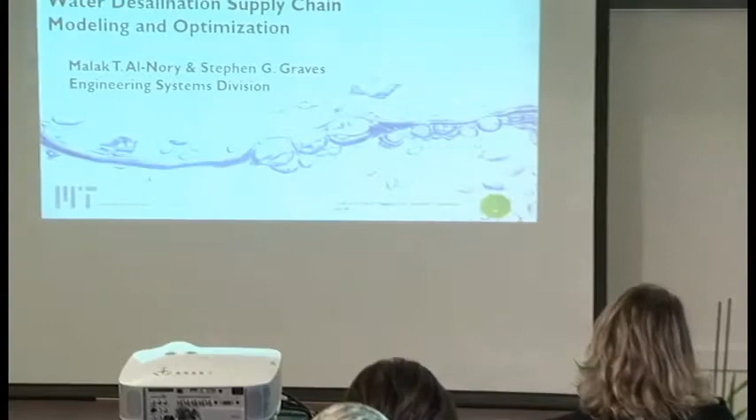I'm Malak Al Nory. I'm working with Professor Steve Graves from Engineering Systems Division. My work is basically focused on modeling the water desalination network as a supply chain. The main idea is that we can benefit from existing models in the supply chain theories to be able to optimize the performance of the desalination supply chain. So for the first time, looking at the desalination industry network from a supply chain perspective.

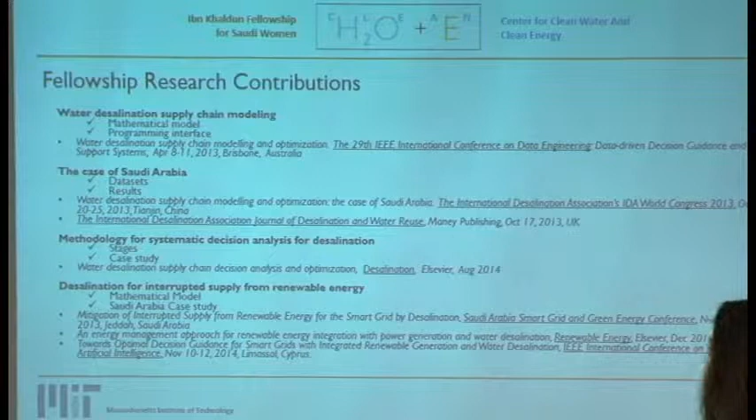These are the areas that I looked at in my fellowship. By the way, I'm the last speaker, but I'm the first Ibn Khaldun Fellow. I started in September 2012, so basically I'm in my third year now. I looked at the water desalination supply chain modeling. That was the proposal of the main idea. And this work was discussed in IEEE International Conference on Data Engineering in Brisbane, Australia.

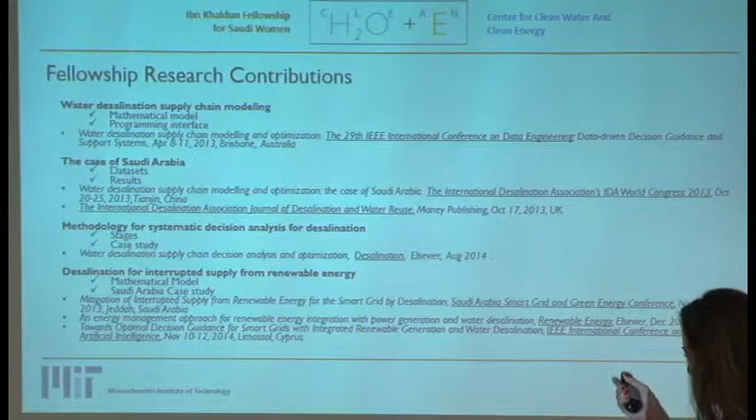Also, I looked at the application on the case of Saudi Arabia, and that was discussed in International Desalination Association World Congress in Tianjin, China, and IDA Journal of Desalination and Water Reuse. And then we proposed a methodology for decision makers in desalination. And this was published recently in the Desalination Journal in Elsevier, this August.

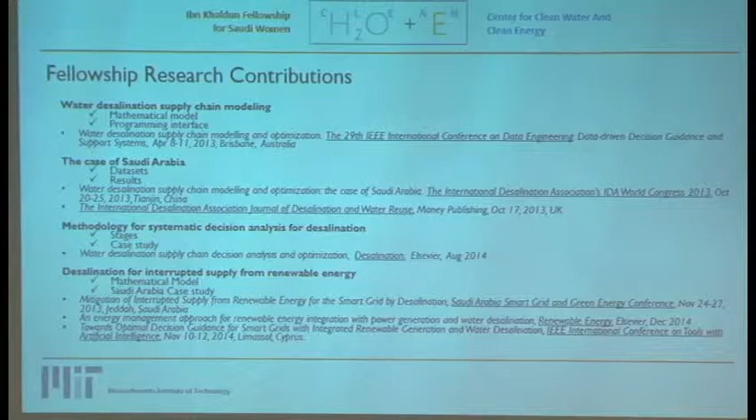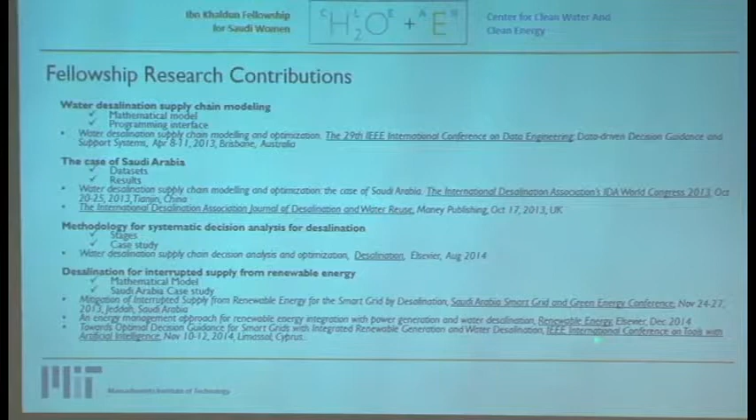And the last area that I worked on is desalination for interrupted supply from renewable energy. That was my work during this past year. Initially, the work has been discussed in Saudi Arabia Smart Grid and Green Energy Conference, and then an extended model proposed in the Renewable Energy Elsevier Journal, available online, but the publication date is December 2014.

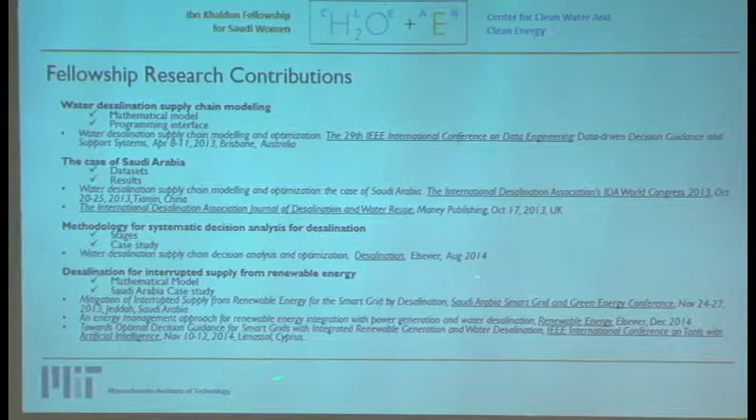And I will be presenting an extended model next month in IEEE International Conference on Tools with Artificial Intelligence. So I'll first start by talking about the first three areas, which is the main idea.

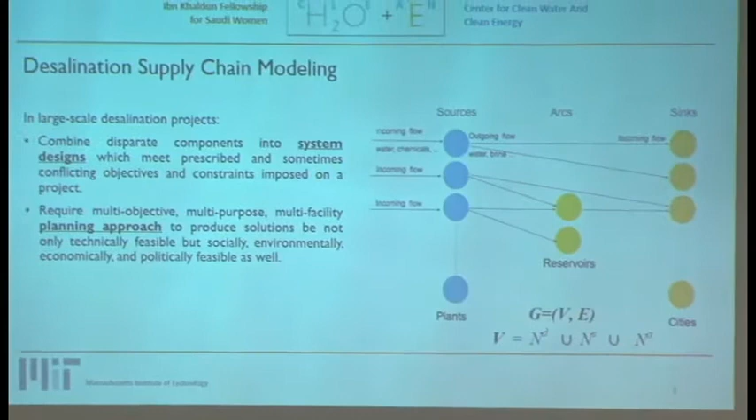Mainly in desalination projects, there are many strategic decision alternatives that need to take place when we first start to establish the desalination plants. In terms of what is the technology that needs to be used, what is the energy source that needs to be implemented, what is the capacity that needs to be installed, which geographic location, and many other technical decisions related

to the design of the plant and the operations of the plant, how much should we produce, also the network structure, how should it be, and how can we use it, and what are the quantities that should be pushed through the network. Specifically in large-scale desalination projects, there are many different components that we need to look at in order to create system designs.

Now, viewing the desalination network as a supply chain allows us to optimize at a system level, at the global level, rather than just looking at optimized performance for a specific unit or a specific plant. So this way we can basically perform multiple objective models and multiple purpose, possibly looking at cogeneration of water and power, and looking at a multi-facility planning approach.

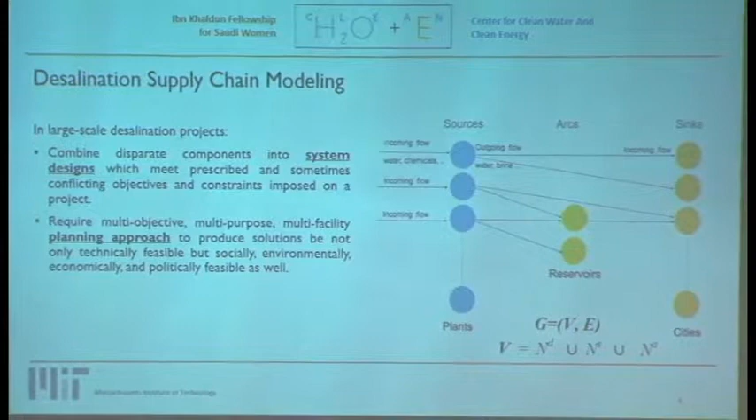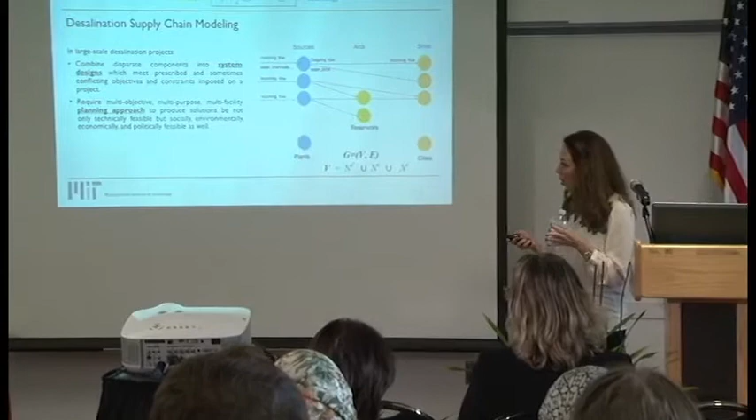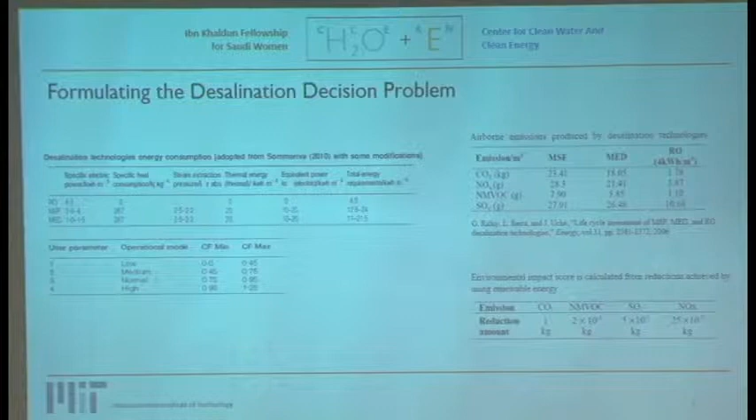For example, we looked at the capacity factor, and we modeled that into the network model. We looked at the energy consumption as well, thermal versus electrical consumption for the different desalination technologies. We looked at the airborne emissions, CO2, and the different airborne emissions by different desalination technologies, as we can see here.

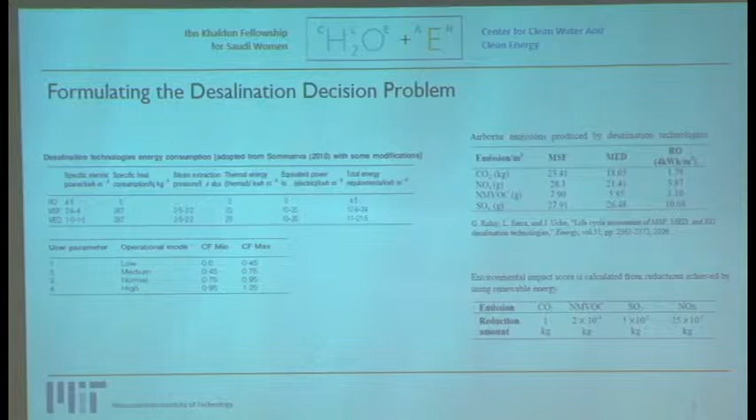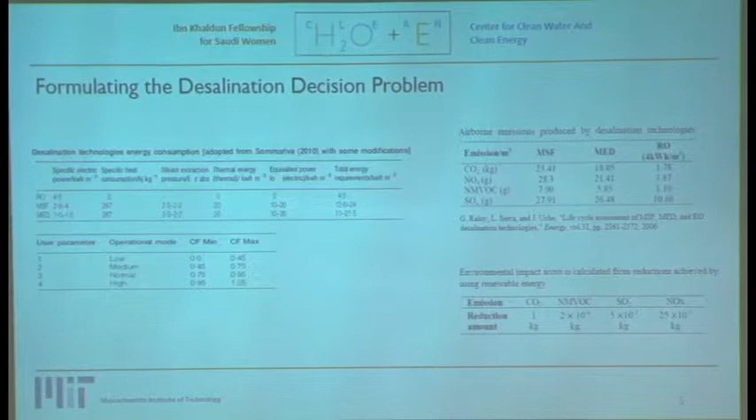And we created a way so we can scale or give a score for each desalination network design. And this score is based on the amount of the reduction that we can achieve by using renewable energy instead of the conventional desalination technology for each of the components.

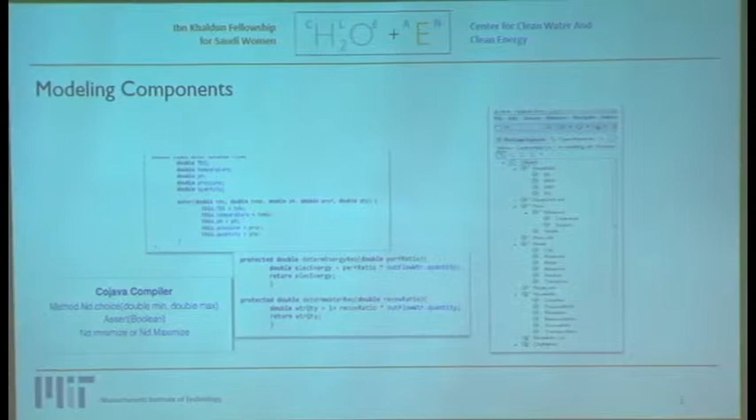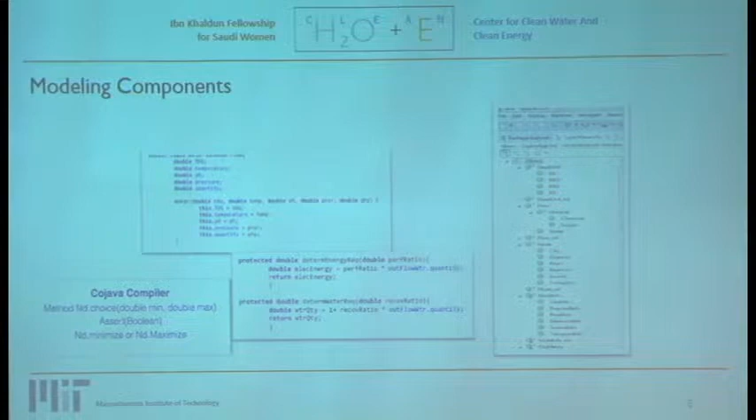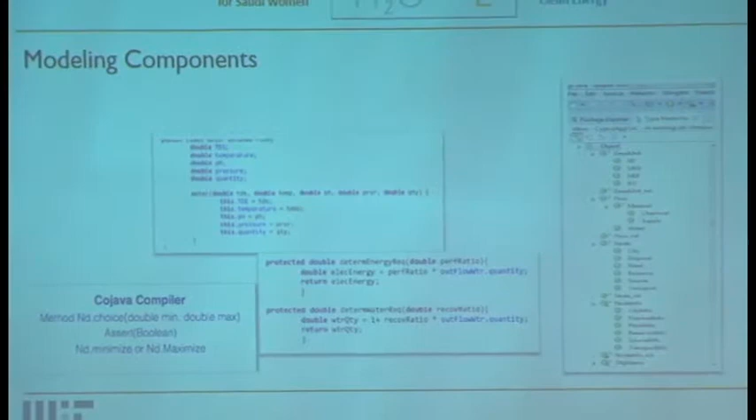Initially, we created a programming interface based on Java programming, so the user can compose the desalination network visually by simply pulling these Java classes, which represent the desalination units, the material, the different nodes, and these can visually be translated into Java code, and then using a specific compiler, it can be translated into a mathematical model, and then can be solved on mathematical solvers. Then the user can obtain optimal solutions for their specific suggested design.

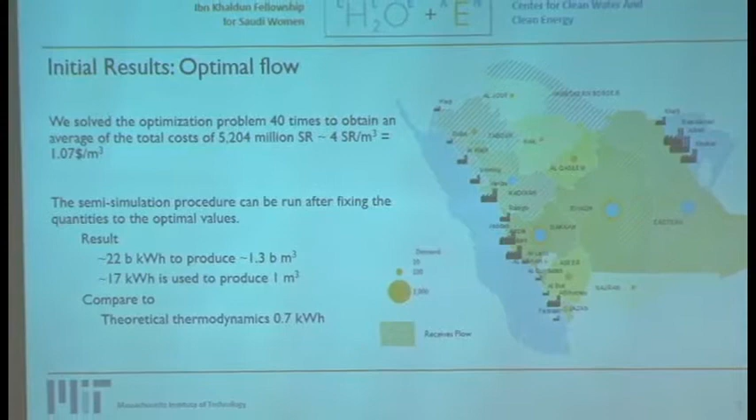From the initial analysis that we have done using that previous modeling components and the network model, we obtained these results, which is basically what is the optimal flow of desalinated water given the existing desalination capacity and the existing network in the country and the demand in the different 13 regions of the country. Where should the flow go?

So you can see the striped areas here that should receive flow, and the other areas should not possibly receive flow. They rather should use other types of water resource because it's not feasible or not economically optimal to receive it here. And we did analysis at the average cost of producing 1 cubic meter of water, which is $1.07 overall as an average.

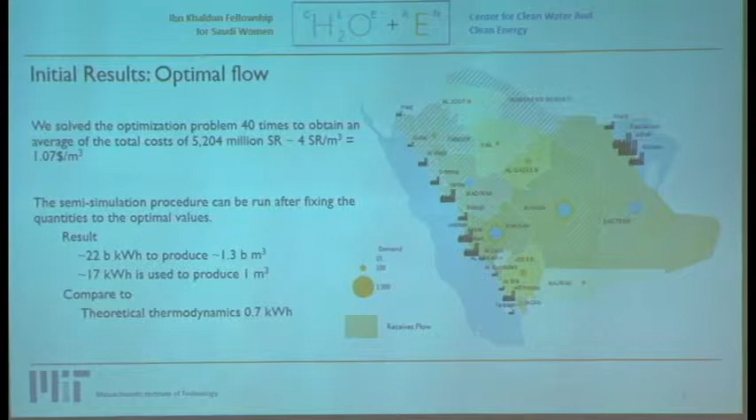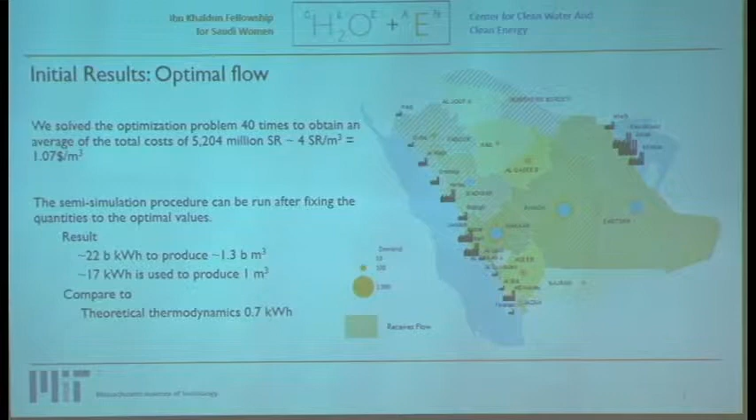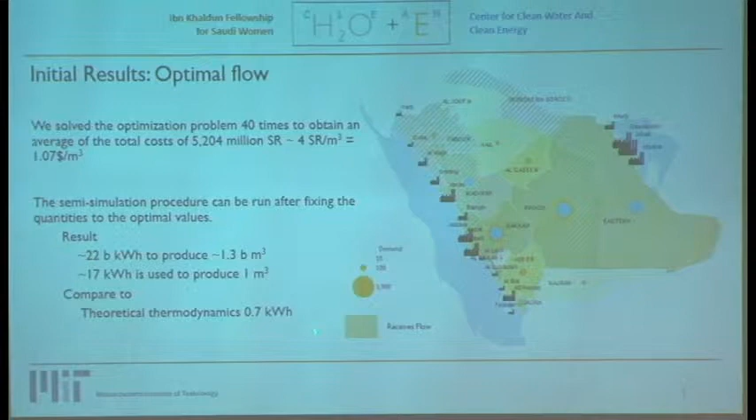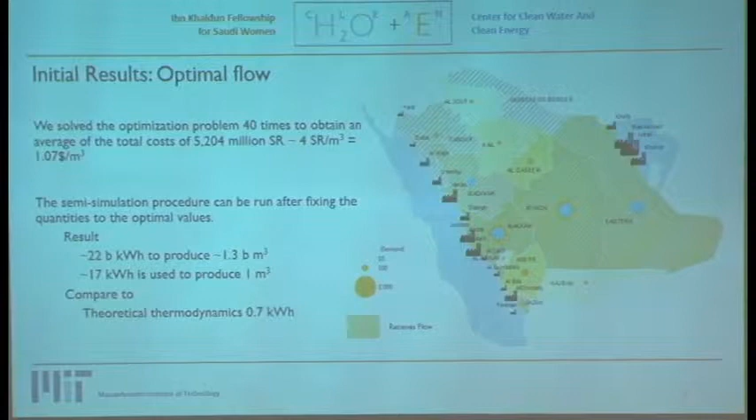And this might seem efficient, but this, however, includes lots of subsidized prices for fuel. So this would be misleading. But looking at the energy consumption, which is on average 17 kilowatt hours to produce 1 cubic meter, and comparing this to the 0.7 theoretical thermodynamic minimum shows that this is not an efficient operation. Basically, because in Saudi Arabia they mainly use the MSF and MED, the thermal processes.

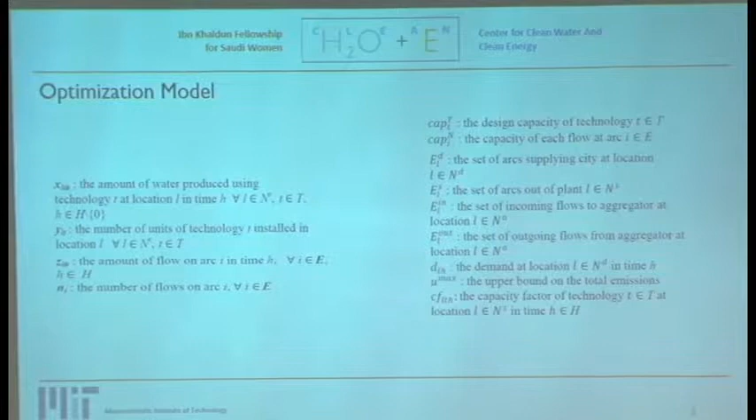We extended that network model into a more elaborate optimization model with mainly 4 decision variables. It includes the amount of water that needs to be produced by a specific technology at a certain location in a certain time in the horizon, and the number of units that should be installed from this technology in this location. So if the number of units is 0, then this technology should not be installed at this location. Also, the amount of flow on a specific arc at a specific time in the horizon, and the number of flows.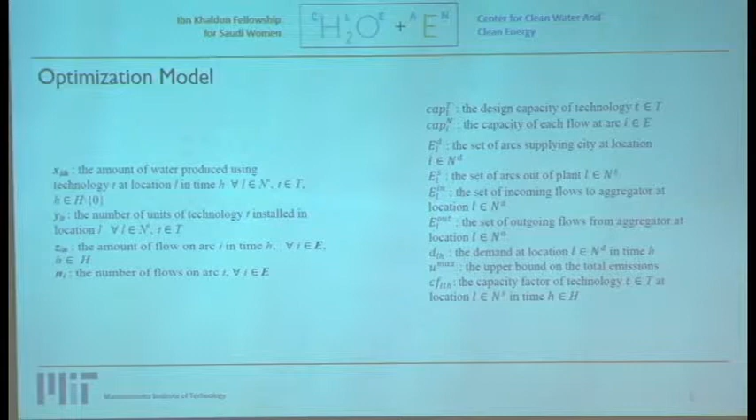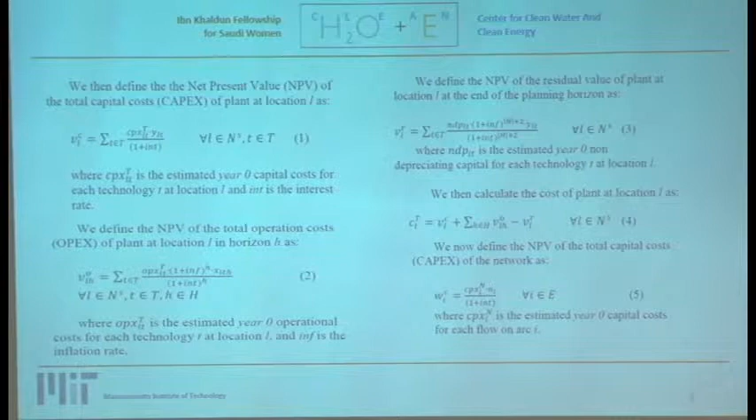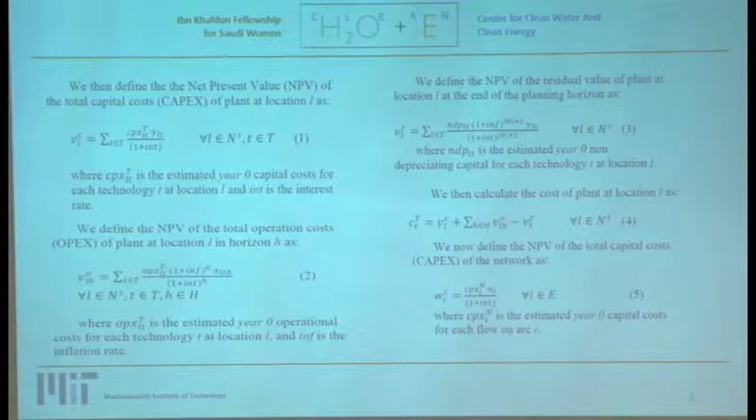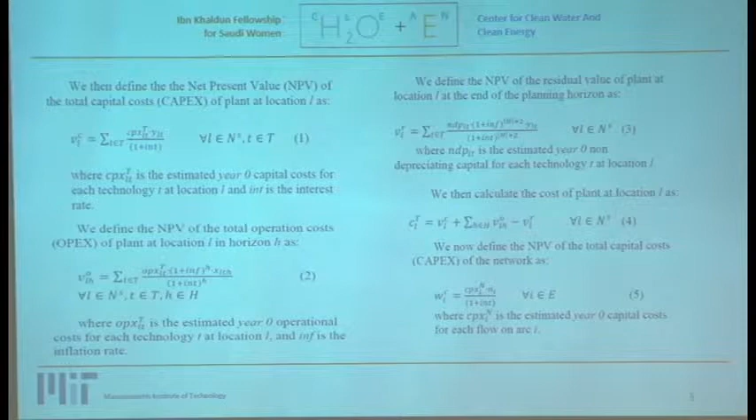Also different parameters. I don't want to go through all these, but mainly the design capacities and the capacity factor for the desalination technologies. We also used constraints to specify the other important aspects of the problem. We looked at the net present value of the CAPEX, which is the capital cost, and the OPEX, the operational cost. Also, the residual value of a plant after the end of the planning horizon, so the depreciation of the land and the equipment and so on, to obtain the total cost of a plant with a certain technology at a certain location.

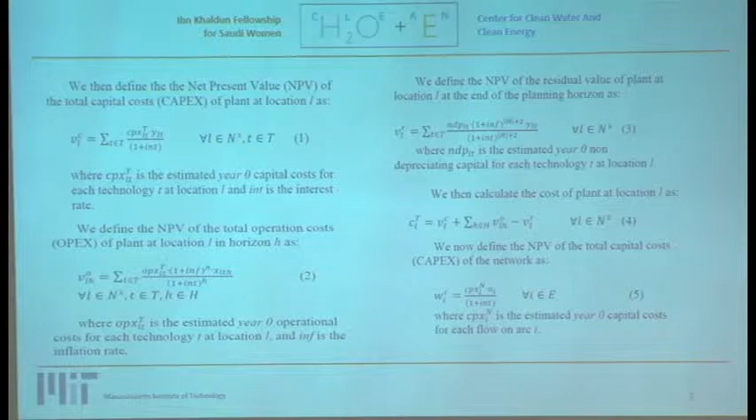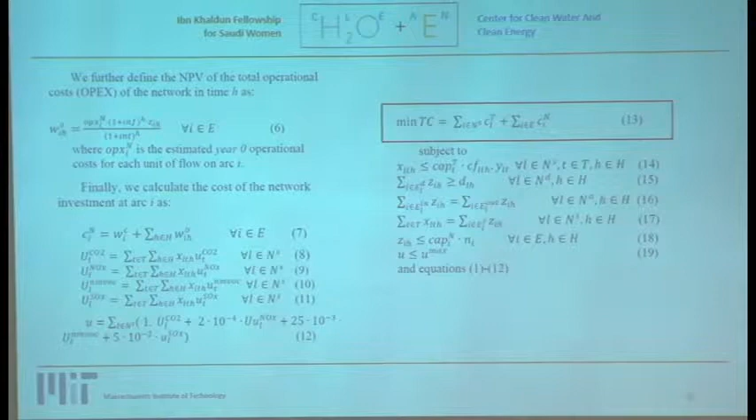We also looked at the NPV of CAPEX and OPEX of the network structure to obtain the total cost of the investment in the network. We also have constraints to represent the environmental impact of certain technologies installed and certain production levels. The objective function then is to minimize the total cost of both the investment in the desalination plants and the network as well, subject to additional constraints of capacity factors, meeting the demand, network structure and the capacity of the network, and an upper limit of airborne emissions from the technology.

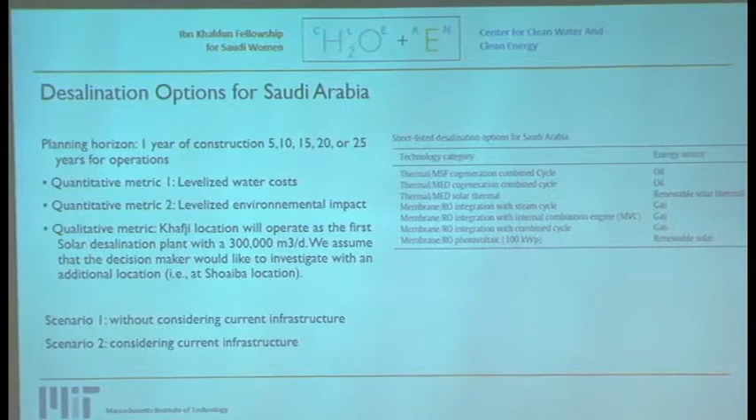Now, we applied this on a case study of Saudi Arabia, of course. We started by looking at the different desalination options in Saudi Arabia, going through the literature and then shortlisting these options from the literature and by consulting with an expert. We see here that the shortlisted technologies suitable for Saudi Arabia, based on the existing ones, the literature review and the expert opinion, are MSF cogeneration, MED cogeneration, MED solar thermal, RO steam cycle, RO with internal combustion engine, RO with combined cycle, and RO PV.

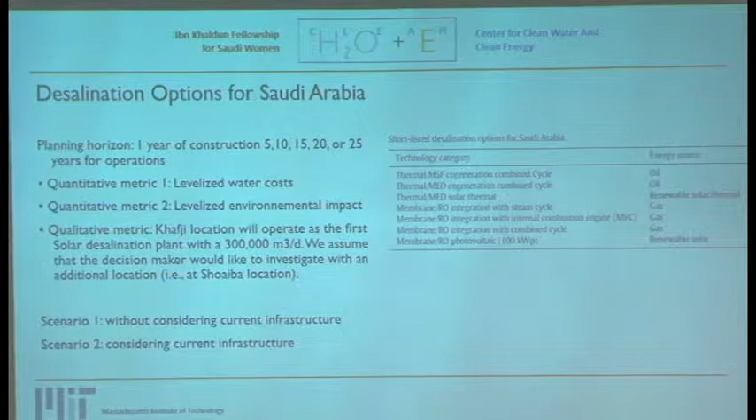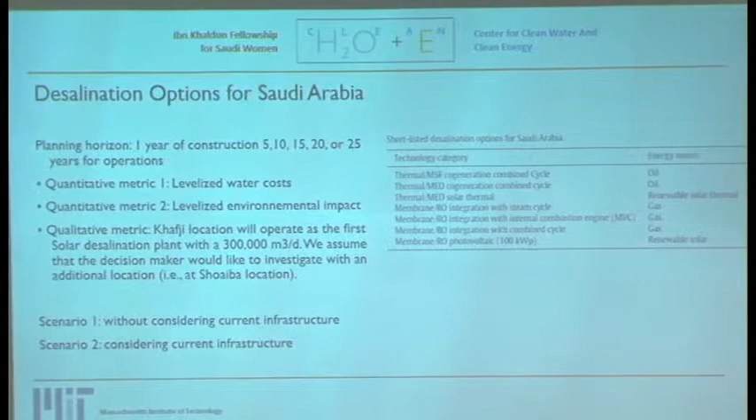Given the optimization model that we created and the methodology that we also proposed, we assume that the decision makers will look at two quantitative metrics. So decision makers can basically use one or more quantitative metrics or performance measures of the specific structure of the desalination network. So we assume that they are interested mainly in the levelized water cost, and second in the levelized environmental impact. We also give the means for the decision maker to add qualitative metrics, as long as they can be represented as additional constraints to the optimization model.

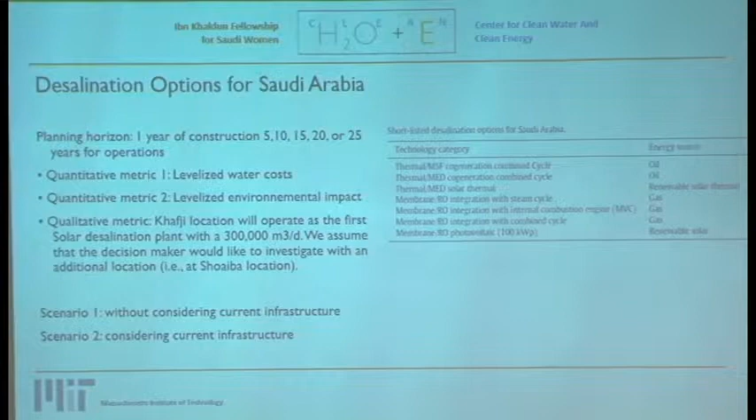So we assumed here that the qualitative metric is that since the Khafji location, as Nora mentioned in her talk, is the proposed location for the solar desalination, we'll fix that at this location we will have this specific technology with this specific capacity and see what happens.

We assume two scenarios. The first one is without considering the current infrastructure, so assuming that we're starting building the desalination network from scratch. And scenario 2 is considering the current infrastructure: using existing capacity, existing network, what should we add to it? And we looked at different planning horizons, from 5 to 25 years of operation, assuming the first year is a construction year.

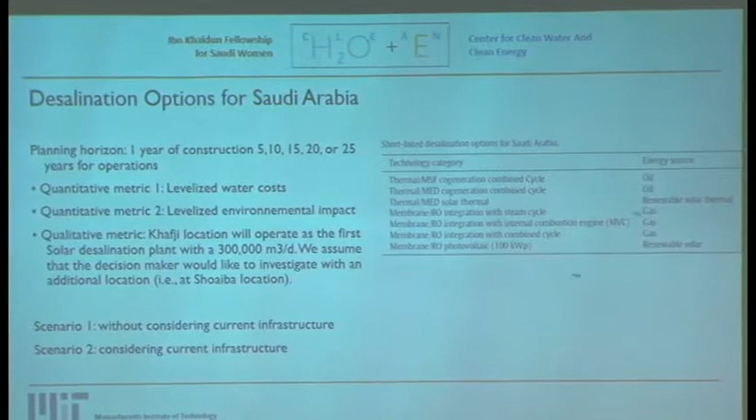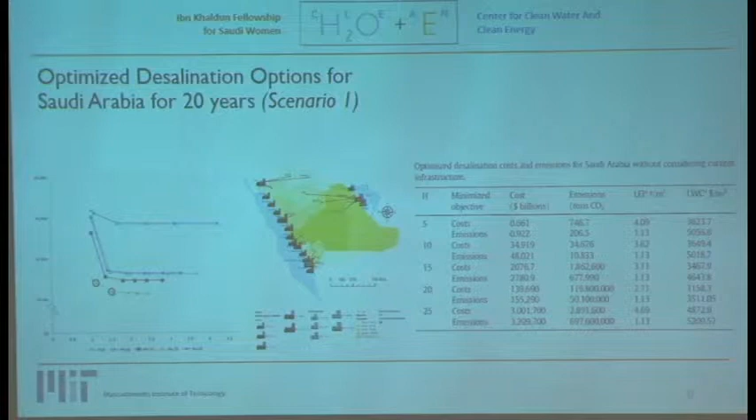And each of the curves represents one horizon. So this is the 5 years, 10 years, 20 years, and 25 years. By looking at the graph visually, the decision maker can easily define what is the most optimal for them, because it depends. The decision maker might decide to go with the optimized emissions. So they would like to have the minimum impact no matter what is the cost.

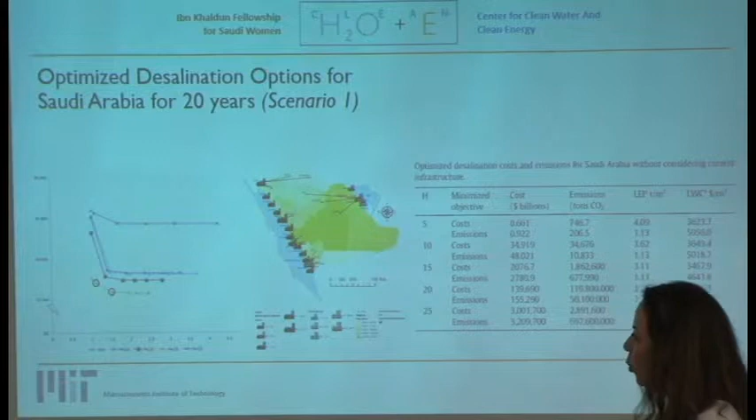But in general, what we thought is that the decision maker would probably choose between these 2 points, because they have both a low environmental impact, which is here on the x-axis, and a low cost. And this is represented by the 20 years horizon curve.

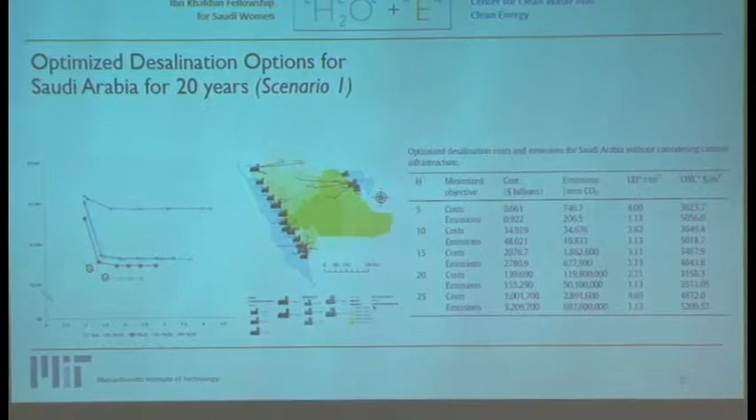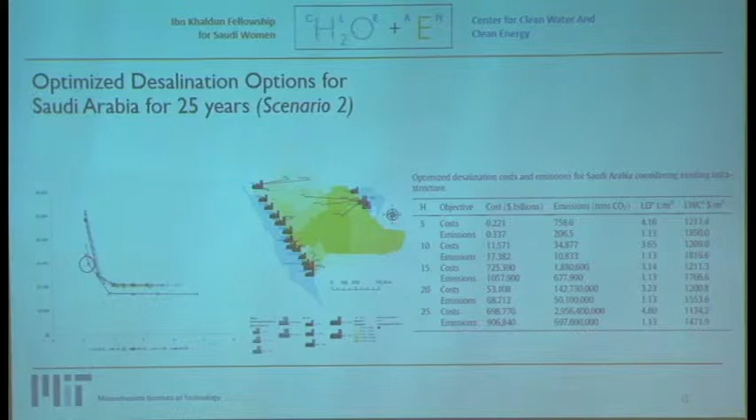In the second case, where we consider the current infrastructure, we have also performed the same analysis, and the curves here overlap a lot, but this seemed to be a winning point where the decision maker can achieve in the 25 years horizon possibly the lowest levelized water cost with the lowest levelized environmental impact. And we also use GIS implementation to show the decision maker the visualized view of the solutions on the map of the country.

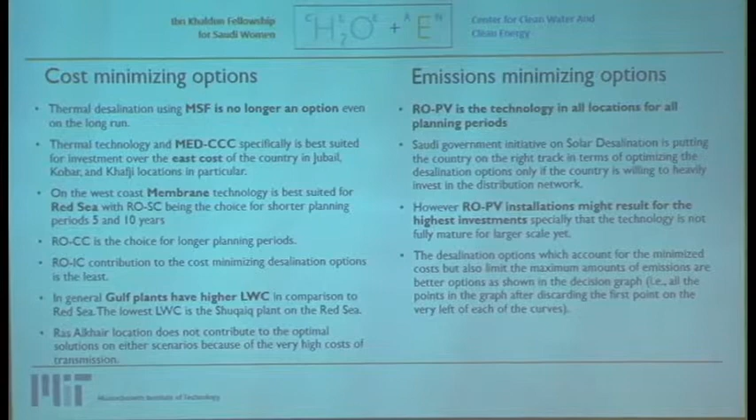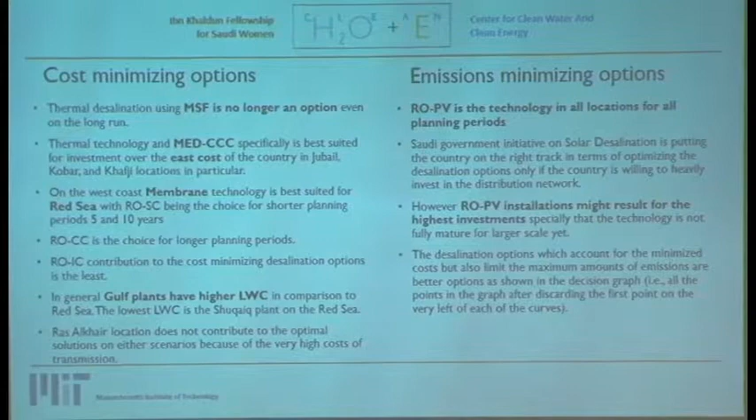Now, overall, we looked at all the cost minimizing options versus the emissions minimizing options from all the points on the Pareto optimal graphs that we looked at. And we obtained some results. For example, MSF is no longer an option. It is not economically feasible anymore. It's expensive. MED is more suitable for the East Coast, where membrane is more suitable for the West Coast.

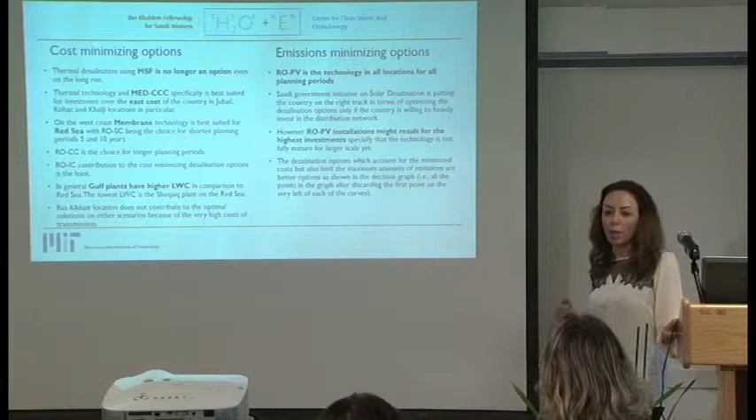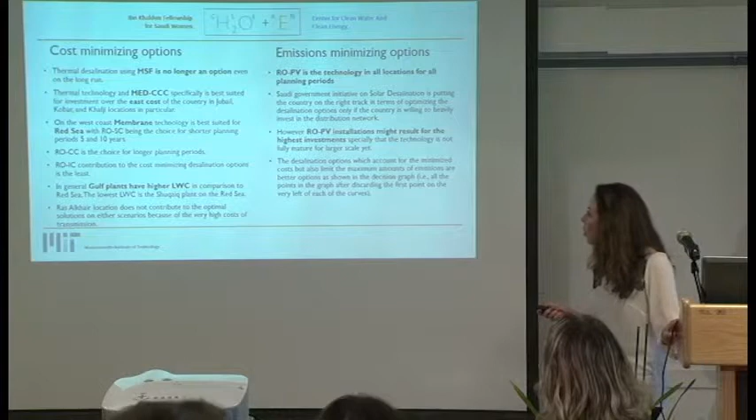Gulf plants, which are the East Coast plants in general, have higher levelized water cost. Ras Al Khair, this is an interesting result, does not contribute to the optimal solution in either scenario because of the very high cost of transmission. This is the most recent plant, and it seems that the operations and the construction are very high cost.

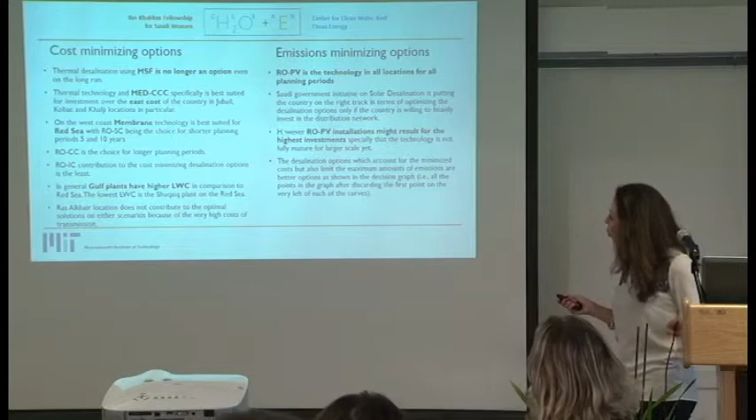On the emission minimizing options, RO-PV seems, in all locations for all planning horizon periods, to be the technology of choice. The RO-PV installations might result in the highest investments though, because the technology is not mature for large scales.

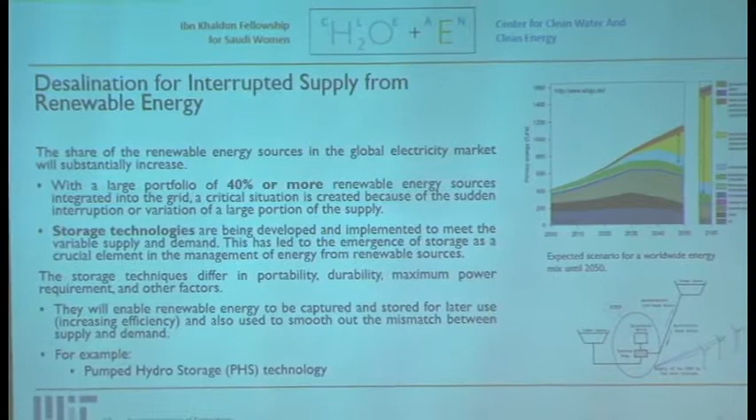The second area that I would just give a brief idea about is using desalination for interrupted supply from renewable energy. Basically, the idea is that because of the increase of the share of renewable energy sources in the market and in the electricity grid, with that increased portfolio, especially if it's as high as 40% or more, the interruption of the supply will create challenges and critical situations for the grid.

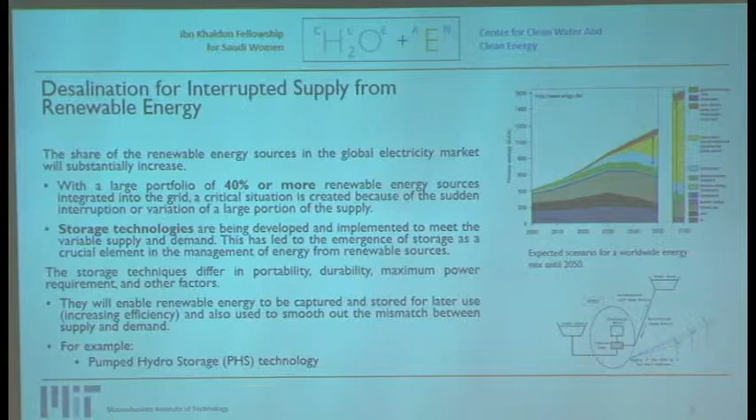The variation of the supply from renewable energy, whether wind or solar, will affect the operations of the grid as well. And this requires the use of storage technologies. Mainly batteries can be used. However, batteries are still very expensive or not as durable as we wish. Other technologies for storage can be used. For example, pumped hydro storage, which is basically accumulating water at an upper basin during the off-peak hours, and then releasing that water during the peak hours.

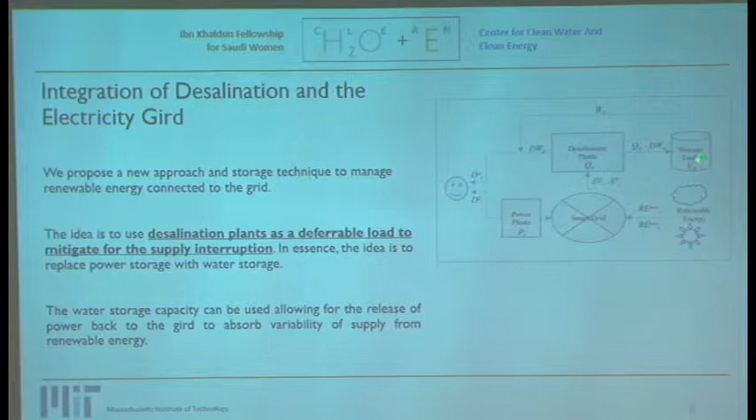Our idea is to use the desalination capacity, specifically the storage capacity of desalination, as a deferrable load to mitigate the interruption of the supply from renewable sources. So, as you can see in this graph, the storage tanks of the desalination plants can be used to store water instead of storing energy. So they become like batteries, where when the interruption happens from renewable energy, the desalination plants can use the stored water instead of consuming additional energy from the electricity grid.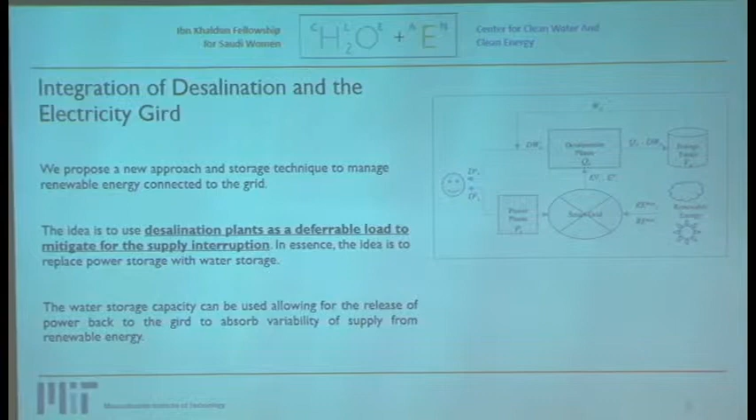To achieve this, we created a model that looks at the production levels of desalination plants, the storage level at the storage tanks, in addition to the power generation at the power plant. So assuming that one authority, similar to the case in Saudi Arabia, is responsible for both the desalination and the power generation. These are the model parameters.

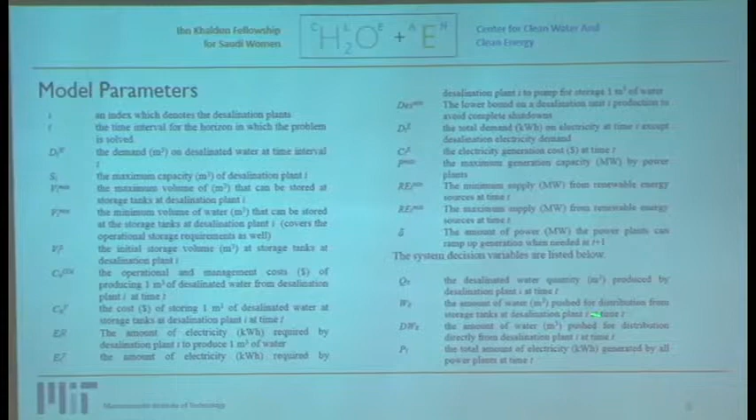These are the decision variables: the quantities produced by desalination plants at a certain time, the amount of water pushed through the distribution network, the water used directly from the desalination plant to satisfy the demand, and the amount of electricity generated by all power plants.

Objective function, again minimizing the operational and management cost of desalination, of storage, and power production, and subject to a set of constraints.

I think I'll focus here on the most interesting constraints, which deal with the renewable energy source. In case we don't have interruption from the renewable energy and we have the maximum provided by the renewable energy source, then the typical or regular production should satisfy the total demand on electricity production. In case of interruption, from solar or from any type of renewable energy, then these two constraints apply.

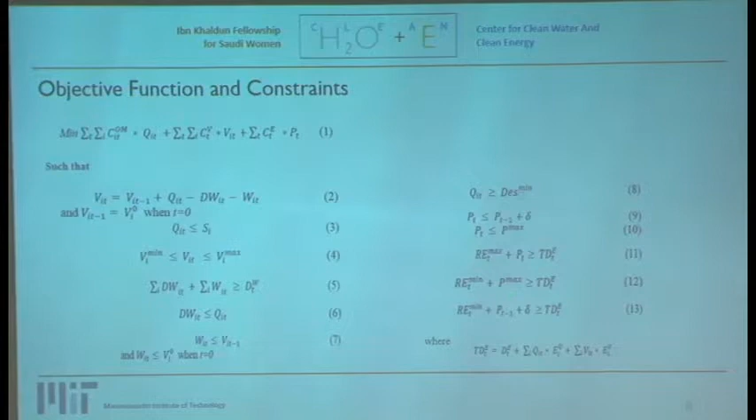If the power production at the power plants is at the maximum, then this constraint will be applied. If it's not at the maximum, then this constraint would be applied, which is basically saying that we can increase or ramp up the generation at the power plant by a delta amount. Because it's not possible for power plants to ramp up the generation to the highest level, they can only generate for the next time period at a certain level.

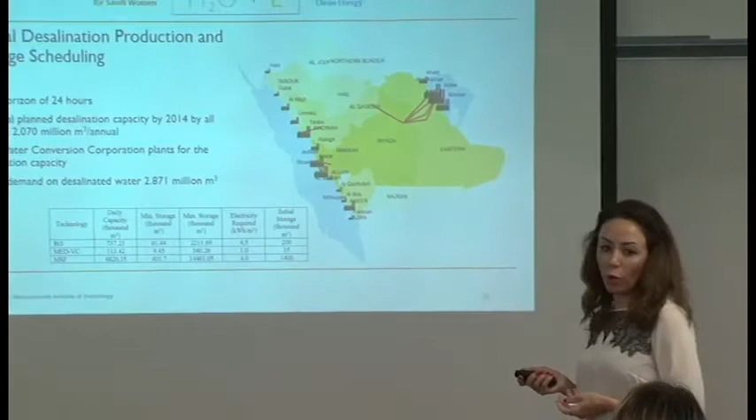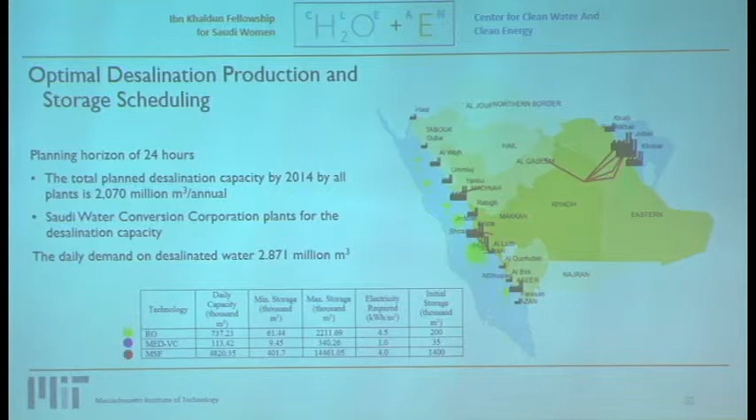We looked at a planning horizon of 24 hours, and we looked at the current desalination capacity in the country and the current demand. We also looked at a profile of the peak load in Riyadh, which is the capital of the country. This day was one day in September, which might be representative of the other days in the year because of little seasonal variation in the country, or in Riyadh specifically.

We also looked at the proposed energy mix by K.A.CARE, which is the main body for renewable energy plants in Saudi Arabia. We assume a maximum of 1 gigawatt, since we don't have any serious implementation of renewable energy sources right now.

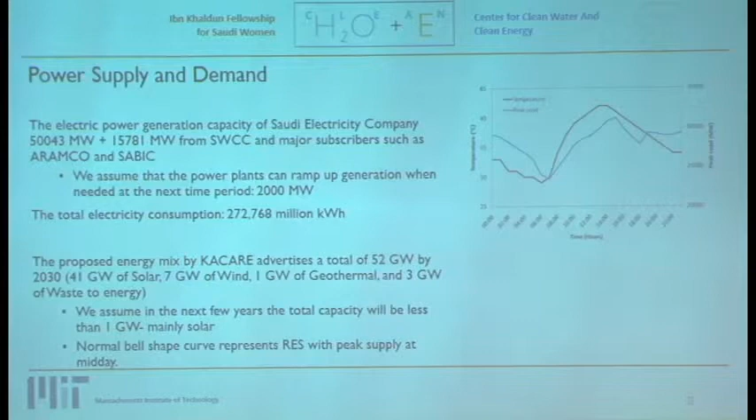Initial results show that, having run this for 24 hours, the renewable supply follows a normal curve, with the peak being at midday. You can see here, even the minimum and the maximum follow the same normal curve.

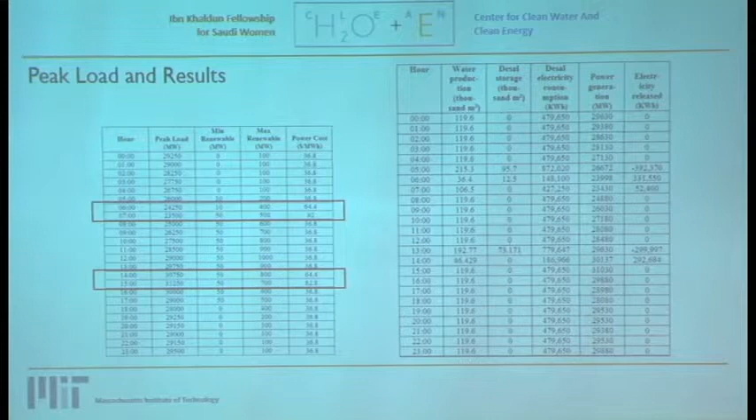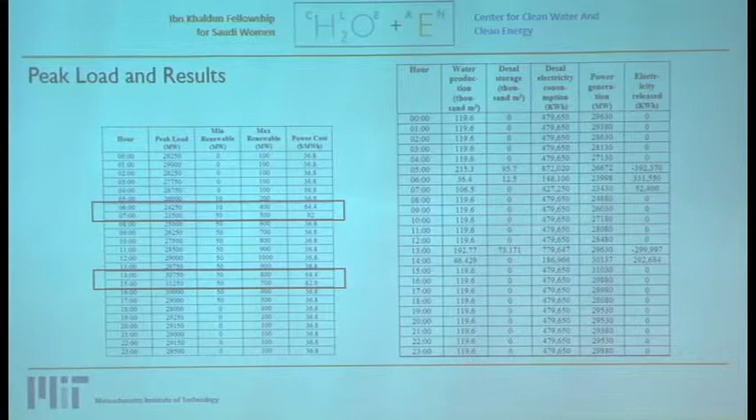The costs are affected by the peak load. So if the peak load is within the normal range, between 25,000 to 30,000, then it is normal and we have a specific cost. If the peak load is lower or higher than normal, then the costs are different.

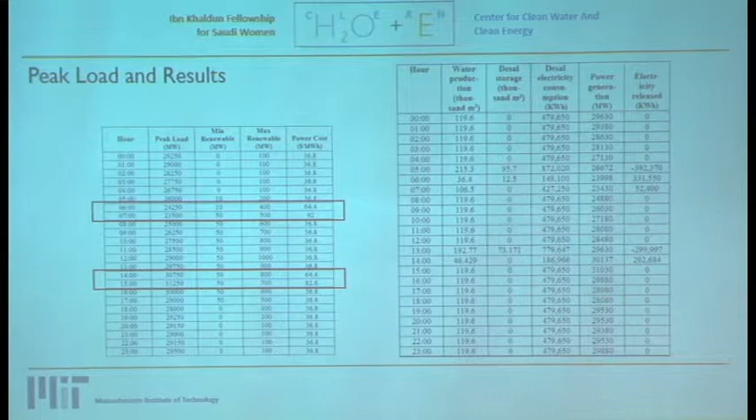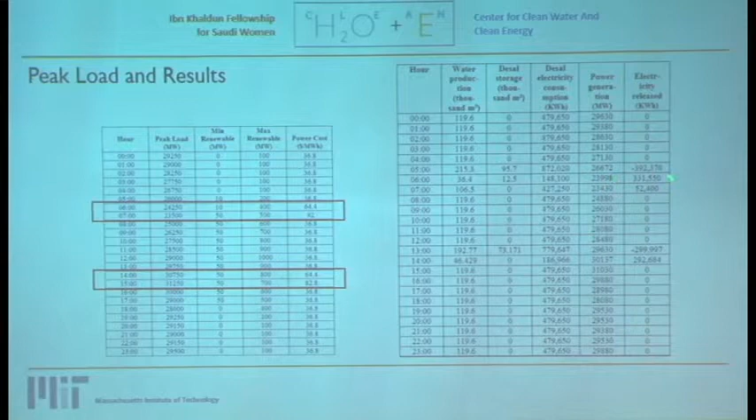This table shows how the desalination plant production reflects changes in the peak load, and how the power generation varies over the 24 hour period, and what electricity is released back from the desalination plants to the grid.

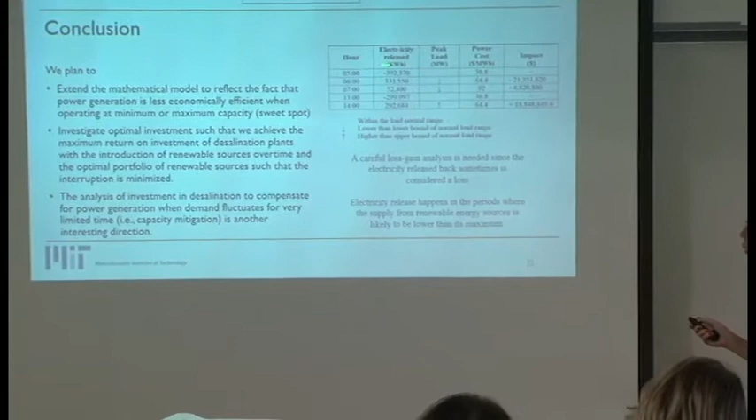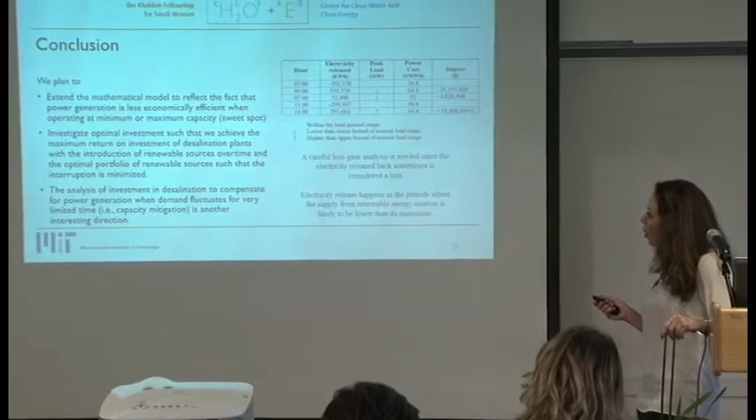In this table, we look only at the hours that had electricity released, to analyze each of these releases. Some of these releases are not preferable, especially if the peak load is already low, since it lowers it more, or it isn't needed anyway, so it doesn't have value. But some are needed when the peak load is high, to minimize the load on the grid.

So careful loss-gain analysis is needed. It's also important to mention that electricity release happens in periods where the supply from renewable energy sources is likely to be lower than its maximum, meaning this release would be advantageous for the electricity grid operations.

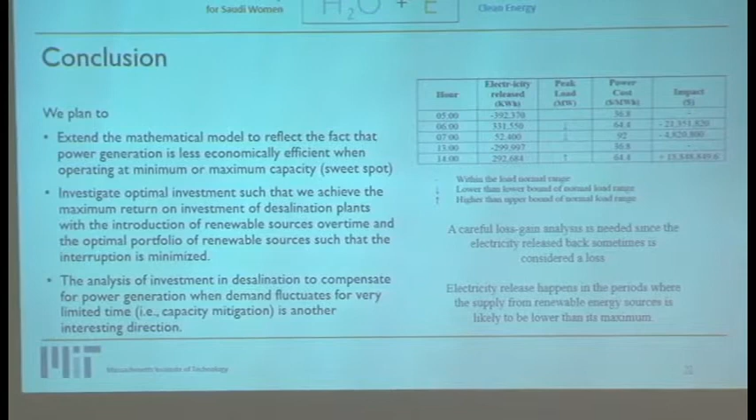We're planning to extend the mathematical model to reflect the fact that power generation is less economically efficient when operating at minimum or maximum capacity, higher than the higher load or lower than the lower load, so finding the sweet spot.

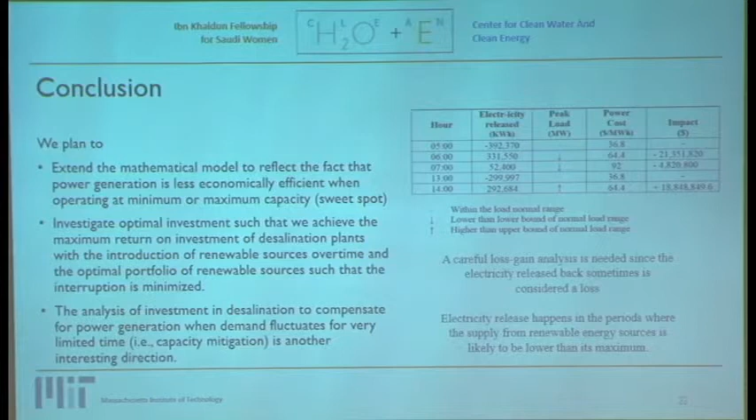We're also investigating optimal investment, such that we achieve maximum return on investment of desalination plants with the introduction of renewable sources over time, and the optimal portfolio of renewable sources such that interruption is minimized. We'd also like to analyze investment in desalination to compensate for power generation when demand fluctuates for very limited time, which is capacity mitigation.

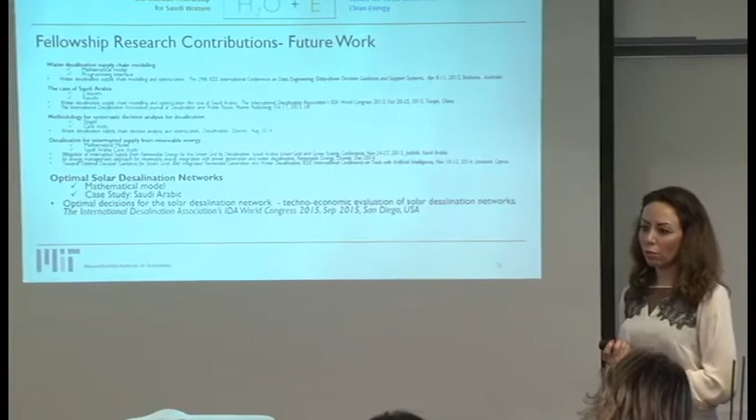For future work, as Noura mentioned, I'm looking at optimal solar desalination networks, focusing on what is the suitable technology for solar desalination in Saudi Arabia, and providing a techno-economic evaluation for the entire network.

Hopefully we'll be able to put this out for the IDA World Congress in September 2015 in San Diego.